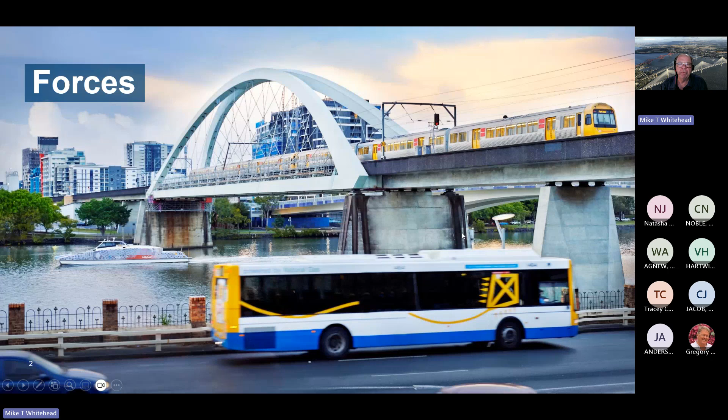So looking at forces first up: when you consider a bridge, we need to understand the forces involved and be able to handle them. Forces can be static, which are stationary forces that don't move, or dynamic forces, which are the moving ones. For this project, luckily we only look at the static ones. We don't have live loads or anything like that running across the bridge, or dealing with water, wind, or anything like that. So the bridge itself supports itself.

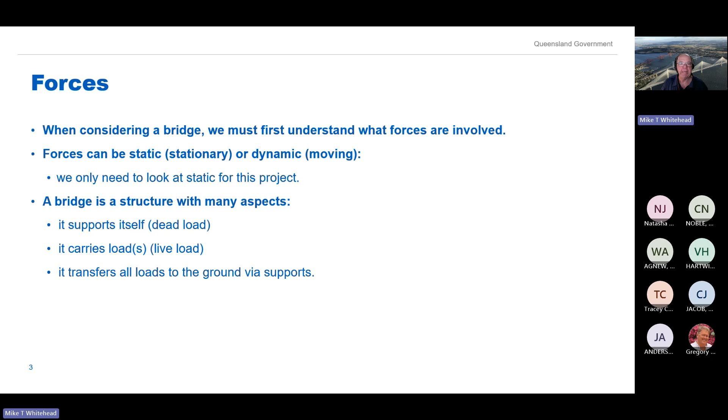It's a dead load, so it needs to be able to cater for that, and that's why we have weight restrictions on these structures. It carries a load, which is generally what we call a live load. In this case, the load will just be a single point load pulled down, so yes it is live as it's increasing, but it's not moving or dynamic across the structure itself. Then it's got to transfer all of those loads to the ground, because it's the ground that actually holds the structure up in the air. In this case, it'll be the test rig's supports on either side.

So when we look at the forces that we're talking about, there are 5 main ones, key ones, that basically all structures have to deal with.

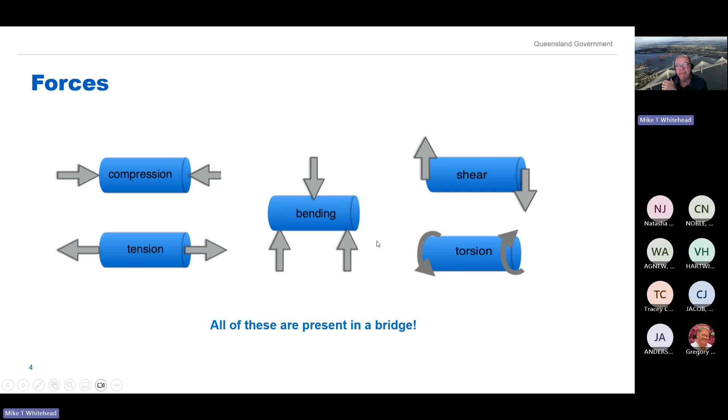When we're looking at compression forces, they're the forces that will squeeze or push the members together, and essentially the member will try to react and buckle, bend away. So the way we can best resist compressive forces is to increase the thickness.

Now what we can do with the spaghetti is, obviously the spaghetti itself is restricted to the size it's manufactured at, but if we put a number of them together, that increases the thickness.

Under tension, that's where they're being stretched, being pulled apart. Ultimately, it snaps. Not much we can do about that, but that's the way that one handles. Again, a couple of strings of spaghetti glued together will increase the capacity to resist the tension.

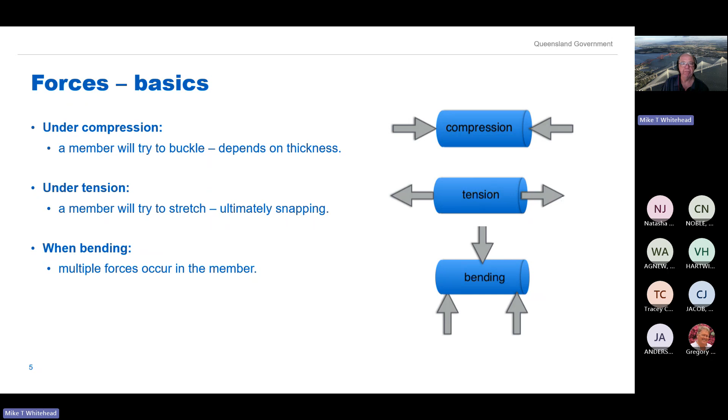And then you've got bending. Bending is where multiple forces occur. So to help explain that, let's look at a simple beam. The force P is pushing down right in the middle. For the spaghetti bridge, it'll actually be underneath pulling down, but it's the same result. And then you have the two supports, RA and RB, on either side holding the structure up. So when bending occurs, you can see the beam is actually bending down, and that's what's going to happen in a simple spaghetti bridge.

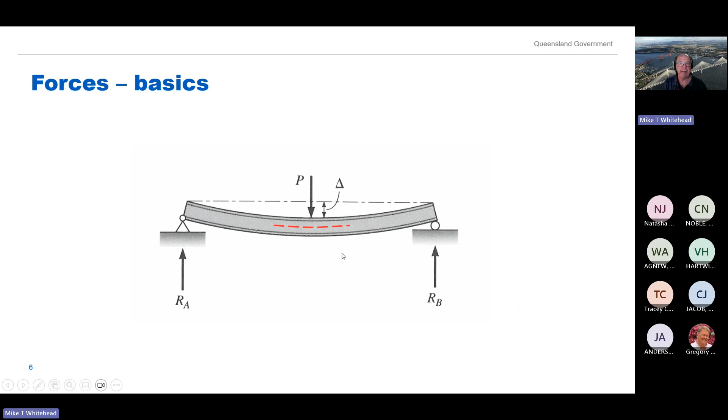Now, part of that beam—if you imagine a halfway line, those red dashed lines—the top part of that beam is actually in compression. The members along the very top are being squeezed together. You can tell because the shape of the bending is shortening it, squeezing it together. Whereas the ones on the bottom are in tension, being stretched. So a beam that's in bending is actually under compression and tension at the same time, and we can use that knowledge to our advantage—I'll show you that soon.

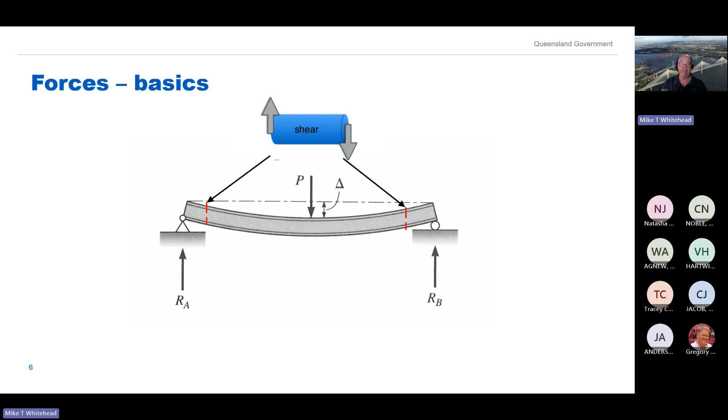There's also shear going on. So when you've got a force pushing down one direction and the support pushing up from the other direction, there will be a plane somewhere, usually out towards where the supports are for a beam, where it's just going to snap—that's where the shear forces are. So in a spaghetti bridge, that's the sort of area where you might need to thicken up some of the structures to handle that.

And the last one is torsion. Torsion is twisting. A beam will try to twist when it's under extreme load, and it depends on the shape of the beam and where the loads are placed—whether they're symmetrical or slightly off to one side. That'll determine which way the beam twists and fails.

So again, what we try to do is get a couple of beams or shapes side by side, and then brace them together so they stop that torsion.

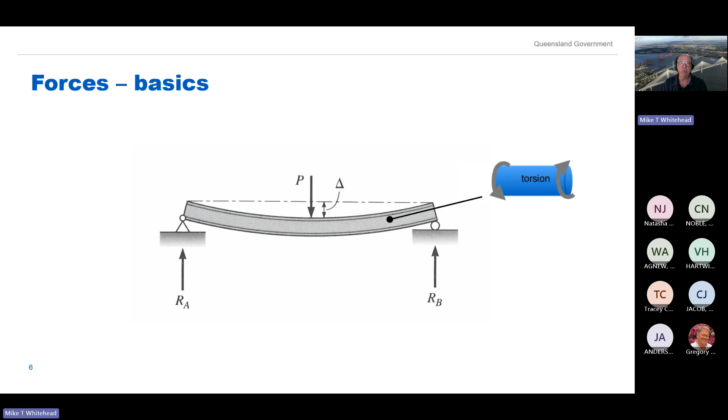So again, the main approach for this project is that the load is applied underneath whatever structure is on top, and the supports will hold that up. Hopefully, if the load is applied in the middle and the structure is positioned well enough on the test rig, the loads will roughly split in half—half going one way, half the other. So the structure should be designed and made symmetrical, a mirror image on either side, so it's handling the loads in the same way.

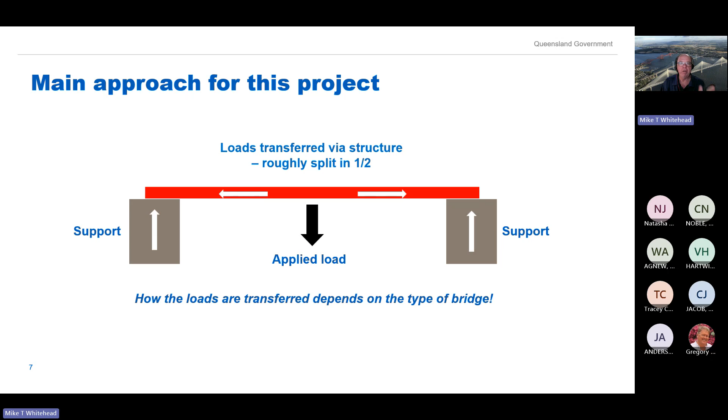We have seen some structures in the past where they do something a bit different on one side compared to the other, and so the loads then split and transfer differently, and the structure can behave in different ways.

Now that we've looked at the basics of the forces involved in the structures, let's look at some of the different types of bridges that we can use. These are the main types you will see: beam bridges, truss bridges, cantilever bridges, arch bridges, suspension bridges, and cable-stayed bridges. You can see examples of all of those in the southeast corner everywhere in Brisbane, and some up in North Queensland.

The beam bridge is obviously the simplest of all bridges. The truss has its benefits, but it's a lot more complicated.

Something a lot of people don't realise is the Story Bridge in Brisbane is actually classified as a cantilever bridge. So what we mean is if we could get a saw and cut the bridge perfectly in half, it would stay up, it won't fall down. Each support on each side of the river is holding the structure up.

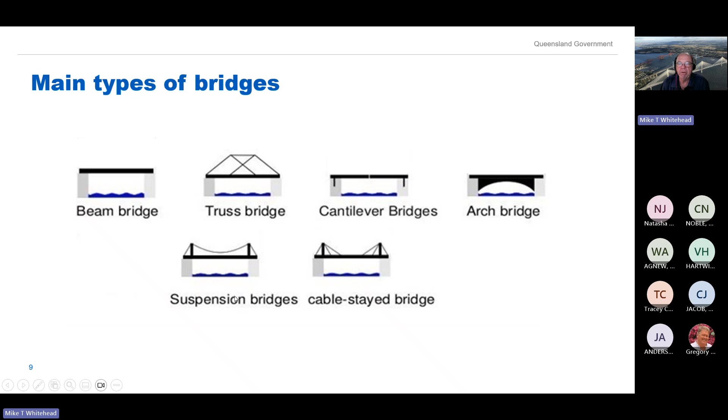We then have our arch bridge, which is one of the oldest forms of bridges around, and then suspension bridges and cable-stayed bridges are more recent versions, but they've also been around a lot more often.

For the spaghetti bridge, the types of bridges we're looking at mainly are the beam bridge, the truss bridge, and the arch bridge. Unfortunately, that arch won't work as shown, so one of the rules is we can't use the sides of the test rig for side support—it's got to sit perfectly on top. So we just switch the arch to the top.

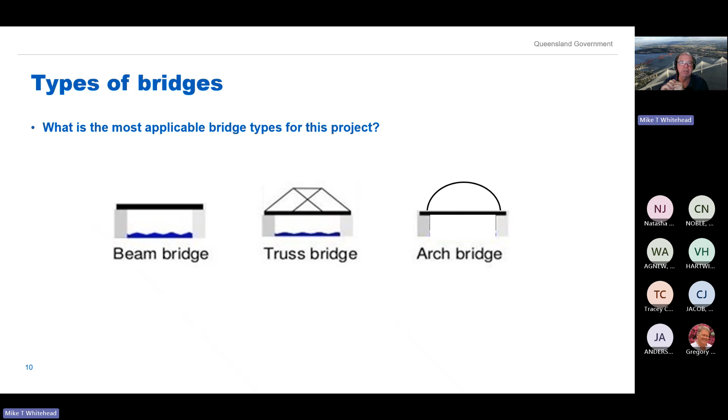Now let's look at some practical applications. The materials you're using are commercially available spaghetti—you just go to the shop and buy it, nothing too flash. You can use glue, which is white glue or PVA glue, hot glue, or super glue. We're not using resins or anything like that, just simple glues.

Dimensionally, the structure must include a loading hook at the midpoint of the bridge—Greg will talk more about that later. It must have a deck, and the deck must be wide enough for a matchbox car to pretend to drive over it, so we're looking at a minimum width of around 3 centimetres for the deck.

It's not a solid deck, so you don't need a whole lot of spaghetti lined up on it. You can have gaps between it, so it's a lightweight deck because we're not actually physically driving a car across it, but it must look like it's a deck for a bridge.

The bridge must span at least 37 centimetres with a clear span of 35 centimetres—that's the width between the test rig supports. If you only make it 37 centimetres, only a centimetre on each side is actually transferring the loads down, so some students make it a little bigger to get it adjusted and transfer that weight.

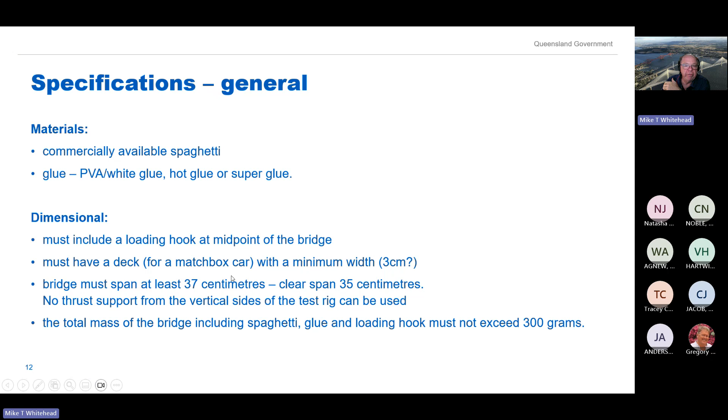No thrust support from the vertical sides of the test rig can be used—that's why, with that diagram of the arch, it was pushing against the sides, which we can't allow, so you have to move the arch to the top. The total mass of the bridge, including spaghetti, glue, and loading hook, must not exceed 300 grams.

So what do we need to consider? Key factors to understand are how the spaghetti performs, and it's a good idea for students to have a bit of a play and try it so they can see what's going on, doing some experiments.

What does it do under compression? If you get a piece of spaghetti and put your fingers on either end and push them together, you'll see it bow very quickly. But if you glue 5 or 6 pieces together and try again, it won't bow as easily—so it's handling those compressive forces much better.

Under tension, you can hold a piece of spaghetti and load it from the other side, seeing how much weight it can carry before it snaps. So that's it under tension.

Obviously try it when it's actually glued—you could try a piece of spaghetti dry, then glue it, let it dry, and see if that changes it. We've heard of instances where people used a lot of PVA glue, and it can weaken the spaghetti, relying more on the glue itself. So, can you bend it? Can you not bend it?

Test it when it's being glued and when it's wetted. You'll see some of the shapes that come up, particularly with the arches, where students in the past have made little rigs for themselves. They've wet the spaghetti to bend it into the arch shape, but then it's got to dry. Does that change the properties of the spaghetti?

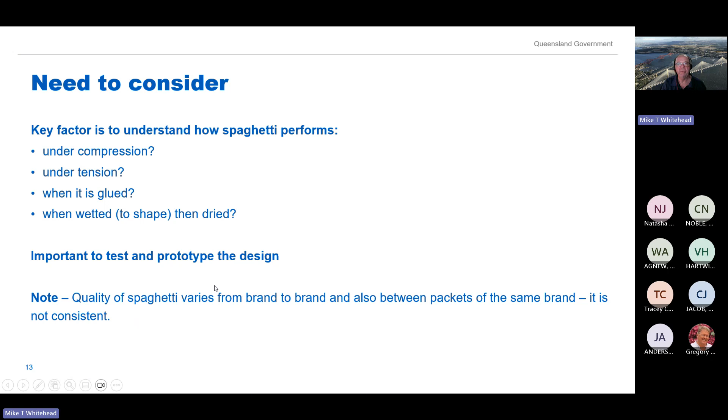How the metal hook is supported is critical. Apart from the hook where we connect the test rig, it's got a little plate, and that plate is what holds the hook to the spaghetti bridge. Students have to think about how they're going to support that and give it as much strength, because that plate is going to want to pull through the spaghetti and fall out of the bottom.

So to transfer the loads to the sides, it needs to be put into the structure quite well. Try and utilize the whole plate area to transfer the load, not just the edges, or it'll pull through quite easily if we do that.

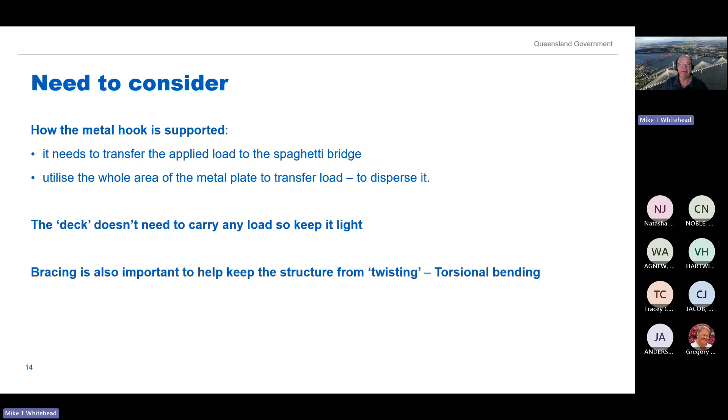As I said, the deck doesn't need to carry any load, to keep it lightweight. Bracing is also important to help keep the structure from twisting. So instead of just looking at a simple beam and making it as big as possible to carry the weight, simple beams will try to twist. What we suggest is to get a couple of them together and brace them up so that they stop the twisting.

Now, if you go down the path of looking at a truss bridge, there are several trusses around. Google them and you'll see all sorts of different ones pop up. The typical ones are what we call the Pratt truss and the Warren truss, and it's just the way they perform and the way their members are put together.

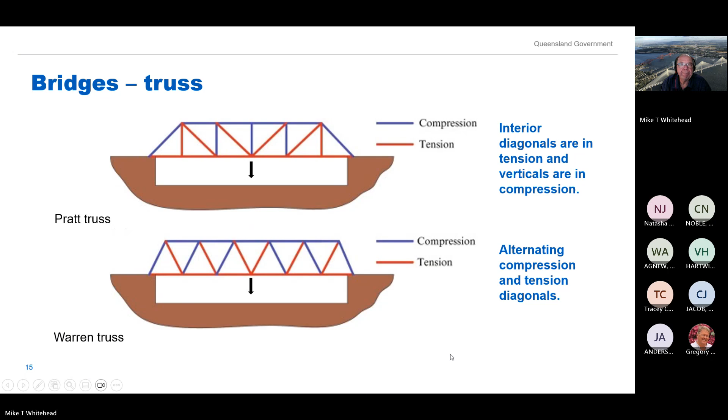Here's another diagram of a truss bridge. This one just shows you the detail. You wouldn't need to go into that for a spaghetti bridge, but it does give you an idea of all the bracing that goes on.

Apart from the deck, which carries a lot of the load, that deck loading goes up into the truss, and the truss then transfers it to either side of the structure. You can see the different members that are available, and you'll also see the cross bracing going on, again to help with the twisting issues.

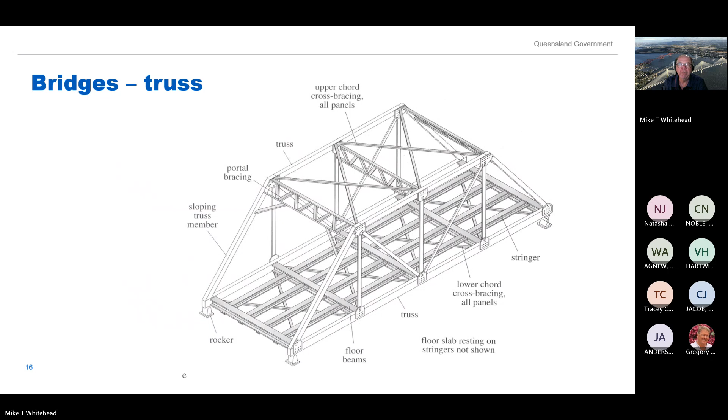A great example of a truss bridge for those up in North Queensland is the Burdekin Bridge. It's one great big long truss, but each component is very similar to the next from one pier to the next.

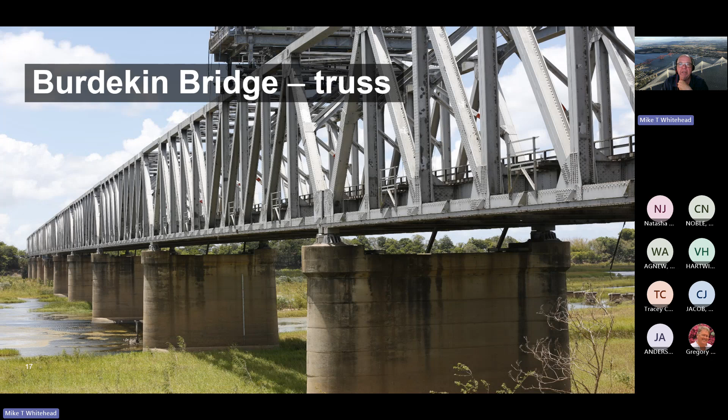Then we move on to arches. So arches are a little bit different. The normal arch, pictured in this diagram, has your stiffening girder or deck where the loads are applied. Then we use vertical hangers to take the loads up into the arch, and the arch transfers them under compression to the supports on either side. So that's a normal arch.

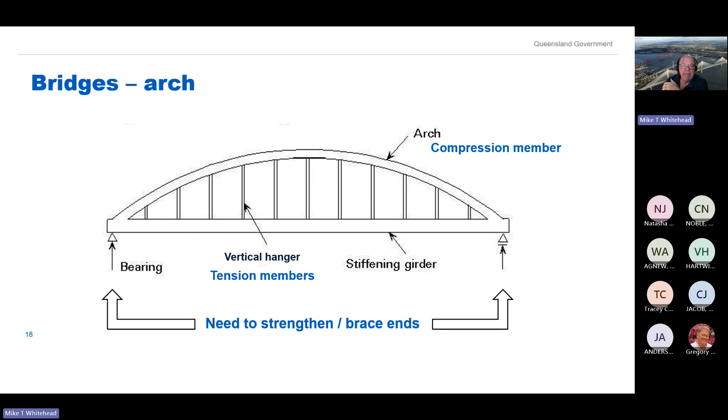With spaghetti bridges, and there's a picture of one in the top right corner, you'll see them if you do some Google searches. Because the load is being applied in the center, the vertical hangers are no longer vertical - they actually radiate out from that. The idea is so that the load is taken straight into the arch by virtually all of the hangers being used. So that's one way of doing it.

But again, the trick here is to get the arch as circular as possible. Obviously, the spaghetti has to be wet or dampened slightly to be able to bend like this - it doesn't have to be much. Some brands are a little better at bending than others, but most will snap pretty quickly, so they do have to be dampened to bend around. This usually requires the team to build a rig so they can bend it around and hold it in place while it's drying, particularly once it's glued.

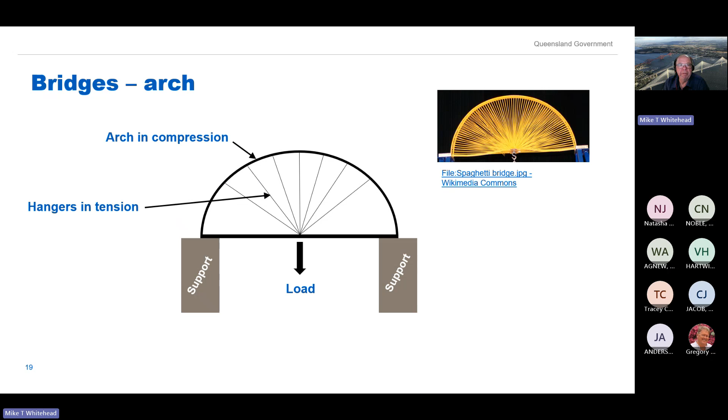There's a picture of an arch bridge in Brisbane. The hangers are a little bit different than straight vertical, but they're certainly not radial out from the center point.

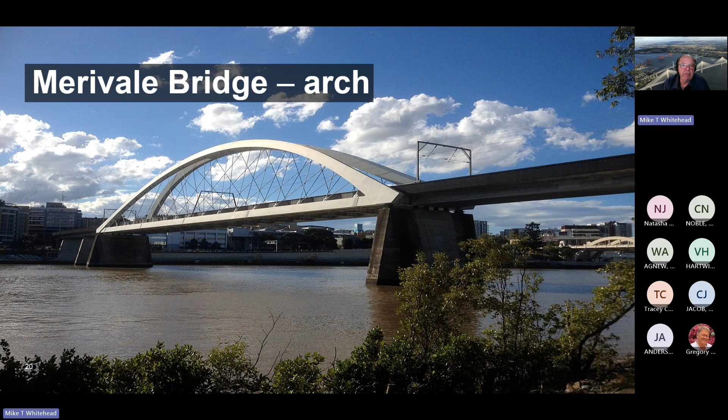So beam bridges are simple structures. Beams or girders need to be thick or deep enough to resist the bending forces. A good example is if you've got a normal 30 centimeter ruler, put a couple of pencils on the table and lay the ruler across those. If you put your finger in the middle, it'll bend very easily and you can touch the top of the desk without much effort at all.

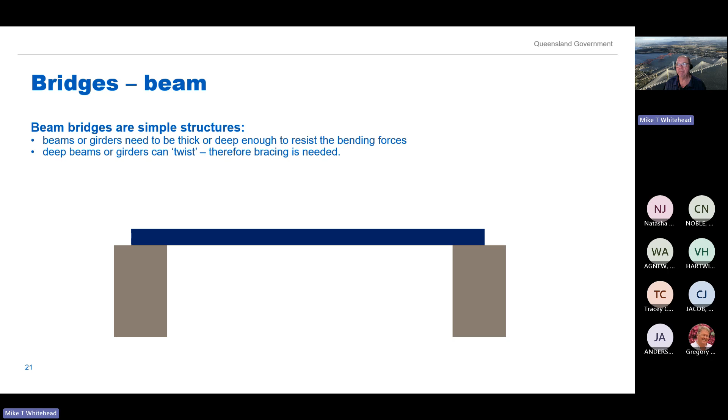But if you stand the ruler up on its edge and try to push it down, you'll find it won't go. So the thickness in the direction the force is applied is where it gets its strength from. But because it's very thin, the ruler will twist quite quickly, so sometimes you need a bit of thickness in width to resist that.

In beams, what we do for beam bridges, for example, we'll have a number of beams depending on the width, but then we'll have cross bracing between the beams to minimize that torsional twisting that could go on. For a spaghetti bridge, you could use two beams, one either side. The deck will go across, and some cross bracing underneath to help with the twisting could be sufficient. Now, there are many different types of beams available.

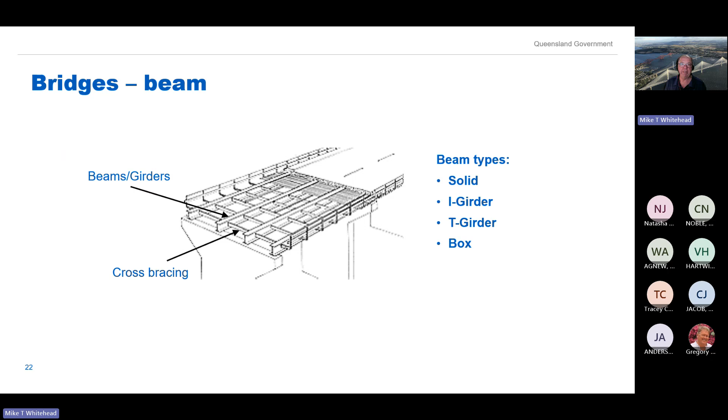So we have solid beams. You can have I girders, T girders, and box girders - we'll talk a little bit about those. In a solid beam, the dots represent a cross section through the beam, where each dot represents a piece of spaghetti. We could give it some width, give it some height, glue them all together, let the glue set, and that gives you what's called a solid beam.

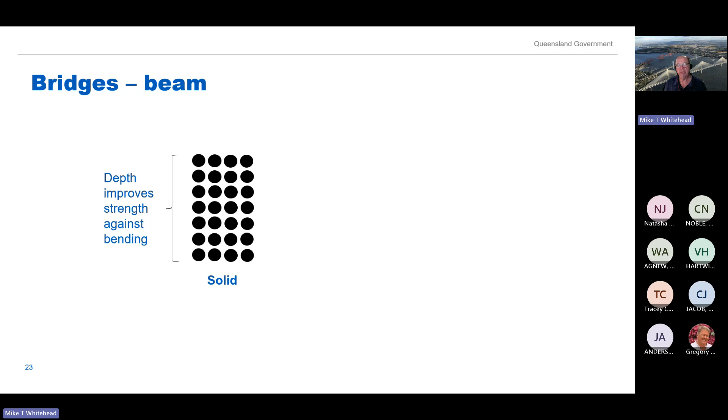So again, the depth improves the strength against bending, so you could do some testing to work out what will actually hold a fair bit. And the width can resist the twisting. Now, if you put two beams side by side with some cross bracing, the width doesn't have to be all in one beam - it can be shared across it. Now, we have two common variations that we can use.

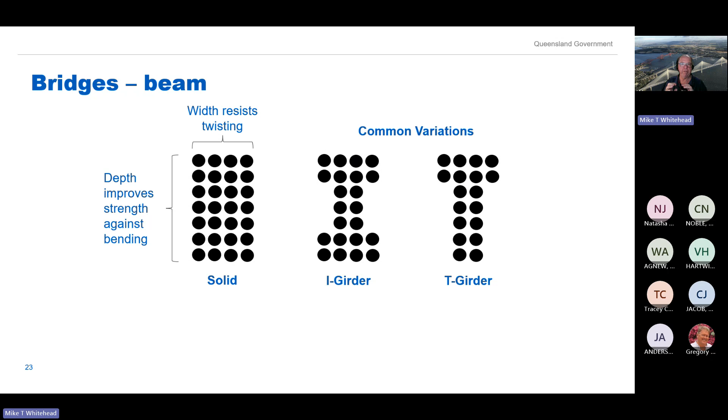The I girder and the T girder. So what are the benefits of these - if you look at the I girder, it's quite thick at the top, also quite thick at the bottom, and thin in the middle. If you go back to that earlier diagram of a beam in bending, the top part would be under a lot of compression, and we know to resist compression you need to thicken it up, so that's where that top flange benefits. The bottom flange for an I girder can also help if the beam is being bent in different directions.

So in the spaghetti bridge, because it's only being bent in one direction, a T girder is probably beneficial. The top of the T gives you better strength on the compression side of things, whereas the bottom is in tension, so you don't need quite as much thickness.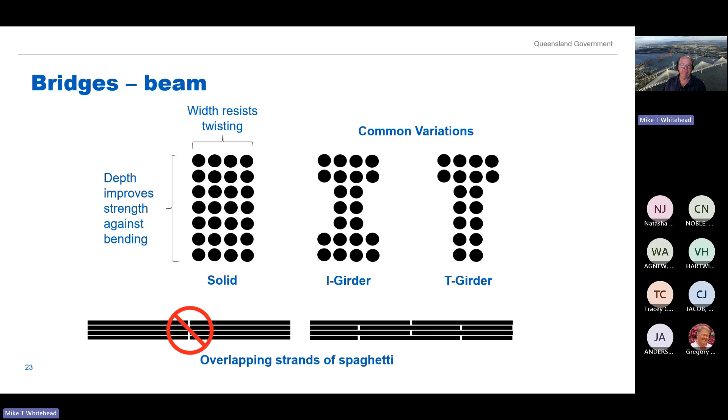The other thing to be aware of is overlapping the strands of spaghetti. When you do a join, don't do it down the middle like demonstrated, because that's relying purely on the glue. It might be arguable the glue is stronger than the spaghetti, but you'd be placing shear planes where the spaghetti is all lined up together. The best thing is to overlap as best you can, so no single join lines up with another. That spreads the shear planes out and gives you a more potentially homogeneous girder or beam.

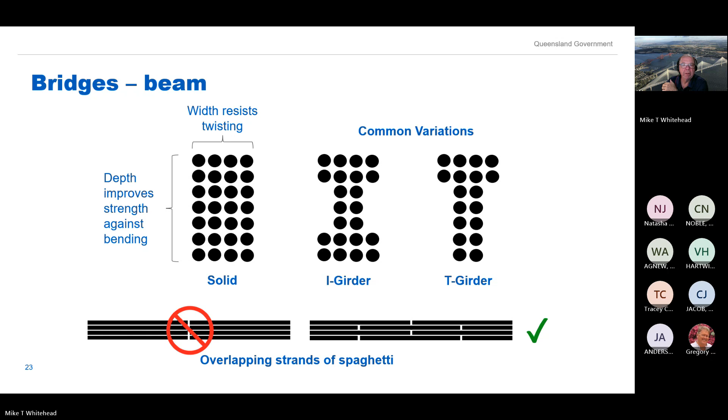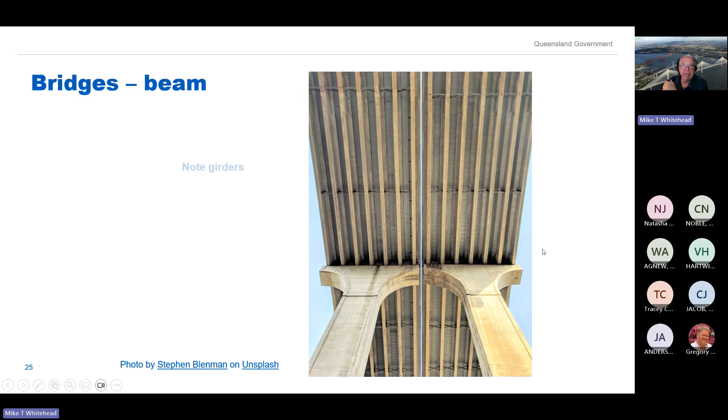This is a picture of a typical beam bridge we build quite a lot of in Queensland. They're simple, cost effective, and do a very good job. Here's the underside of a bridge—not many people get underneath and look up, but you can see a whole series of girders, seven of them, with cross bracing spaced out between them that helps with the torsional twisting.

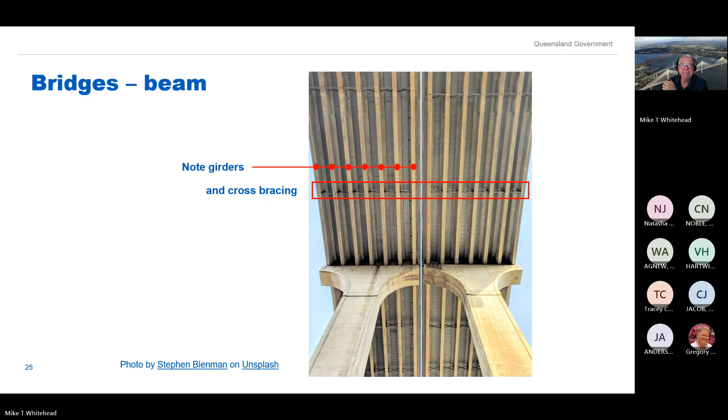The last one I'll talk about is what we call a box beam. Essentially they're a big box, and the Gateway, which the picture is from, is exactly that—hollow inside. The benefit is instead of making a solid beam, they get the strength for bending from the depth, with high walls on the sides and cross bracing across the top and bottom. So it's hollow, and we've got people who can walk inside to do inspections, in the Gateway and the Riverside Expressway too, which also has hollow beams people can walk inside for inspections.

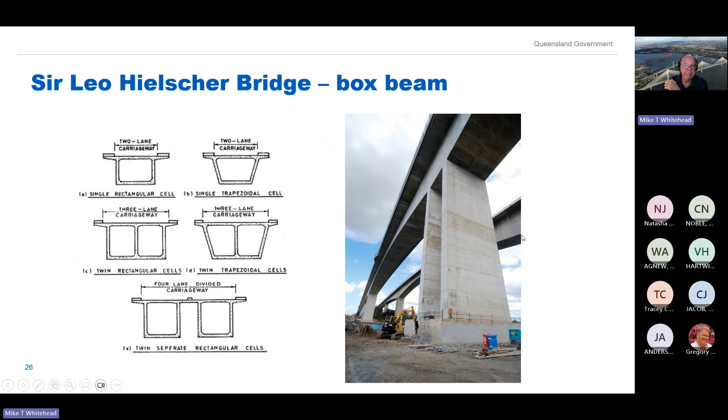The pictures on the left show a number of shapes. But the students, I think, could easily build a simple box beam. The top would be your deck, the bottom would be part of your bracing and probably strong enough, particularly if you strengthen it around where the hook is, and the sides could be quite deep while giving you some strength. I'd like to see a box beam—I don't think I've seen one built in my time with this project, but that's one that would work.

So with the spaghetti bridges, again, I recommend the students, the teams, have a look on Google at different types of bridges, have a look at ones which are stronger. There's plenty of examples of past competitions from various countries. The arches do seem to win out quite a lot, but they're also quite difficult to build—it can present a challenge.

As I said, I think a box beam would be another successful design. We've got a lot of big bridges around the world made of box beams, and they are very capable structures. Try not to get your students to build very thin bridges that are very wide—they will collapse very, very quickly. They need some thickness in the vertical plane so they've got some chance of holding up the weight applied, giving them a chance to have a bit of a win, or at least do well in the competition.

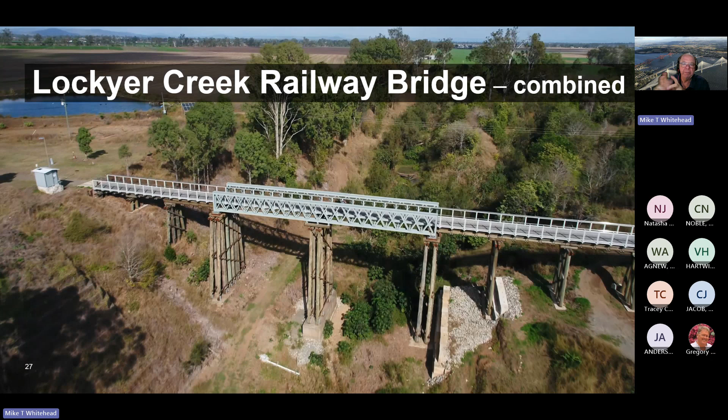But that essentially is it from me. Back over to you, Greg.

Thanks, Mike. Turn on the right thing.

Mike's covered a lot of the information specifically regarding the competition and the specification, so I'll probably cover some of those again, but I think it's important. So welcome to those of you who have never participated in the competition before, but I know there are some of you in the webinar that have done it before and are here for some tips and advice, which is obviously welcome.

If you are new to the competition, it's actually open to all grades from 5 up to 12. So if you're a P to 12 school or a 5 to 12 school, or have really good connections with your feeder schools, if you are a secondary, your primary feeders, then by all means, feel free to invite them to the competition. They are most welcome. We've had the youngest place getters we've ever had were grade 6s from a few years ago, which was pretty cool. They came third, which is very exciting. So it doesn't matter how old, kids are still more than capable.

You can have teams of up to 4. Individual students are most welcome just to design and build a bridge. Teams can nominate more than one bridge. They just have to give their bridge a different name so I can keep track of which bridge is which. But if they want to enter more than one bridge, they're most welcome to do so. Mike's talked about the bridge, the spaghetti and the glue, and I'll go into that in some detail in a moment.

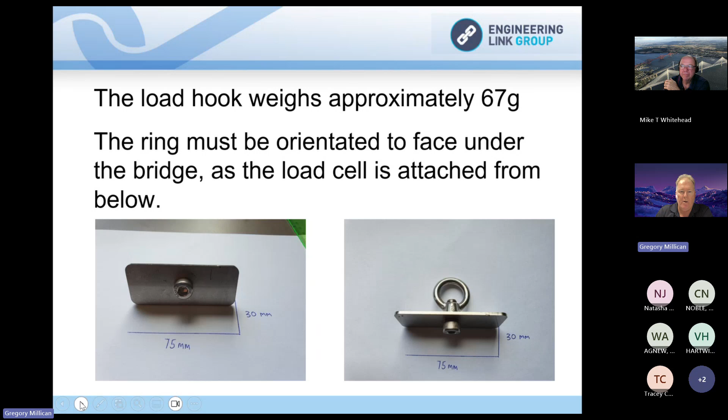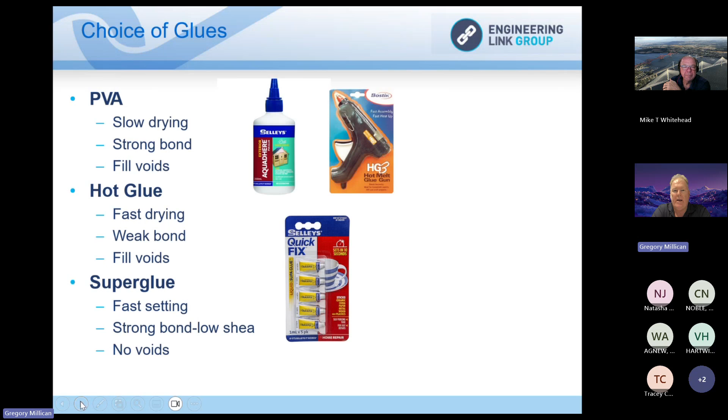What you're not allowed to use is liquid nails in any form, whether that be a caulking gun or in a tube like that, or Gorilla Glue or epoxy glue or anything of that nature.

It's very, very difficult for us sometimes to know what kind of glue has been used. It's pretty obvious when it's Aquadhere and hot glue, but sometimes the super glue and the epoxies can look a bit the same. There's no real way for me to test that, so it's more on a trust thing, to be honest with you. I really have to just trust that schools are doing the right thing. There have been occasions in the past where schools, it's been obvious that they've used the wrong glue, and I've had to disqualify them, unfortunately. It's a very unpleasant conversation to have, I can tell you.

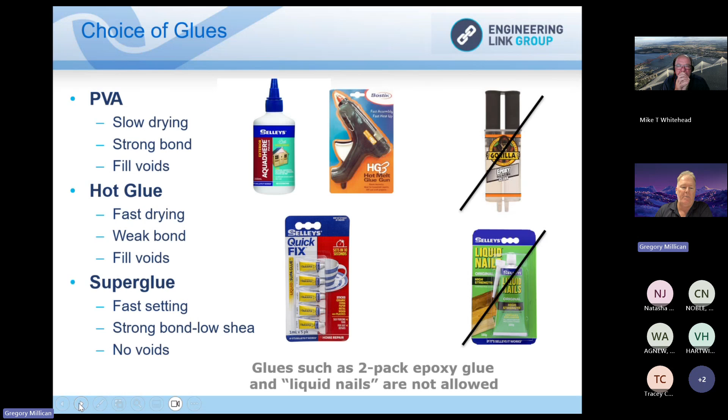So please encourage them to use only the glues that are allowed. If you're at all unsure and you want to check, please don't hesitate to send me an email and ask, or you can ask at the end of the session. Mike went through this really well, so I'm not going to spend a huge amount of time on this. There are a heap of designs up on our YouTube page, including some videos and stuff you can have a look at.

Try different glues, see what works and what doesn't. It depends on your circumstances and how much time you've got.

Think about it - like every good activity, all students want to do is just grab the spaghetti and the glue and start building. But try to encourage them where you can to actually do some design first, and have a think about what it might look like.

Allow them to look at this. The recording of this video will be up on YouTube and on our website. Students are encouraged to have a look at it, particularly the first part, to get those ideas and make their bridges as best they can.

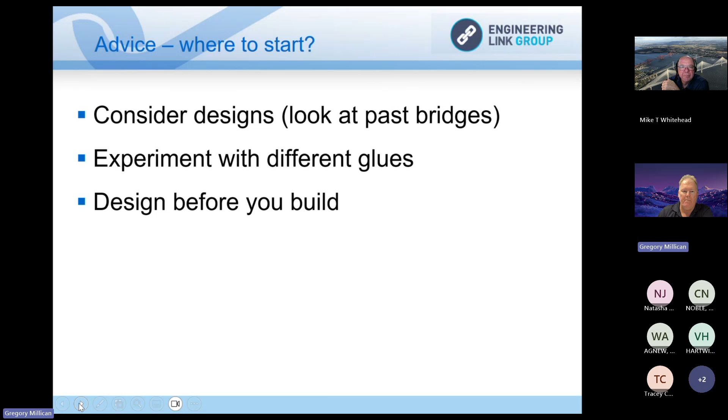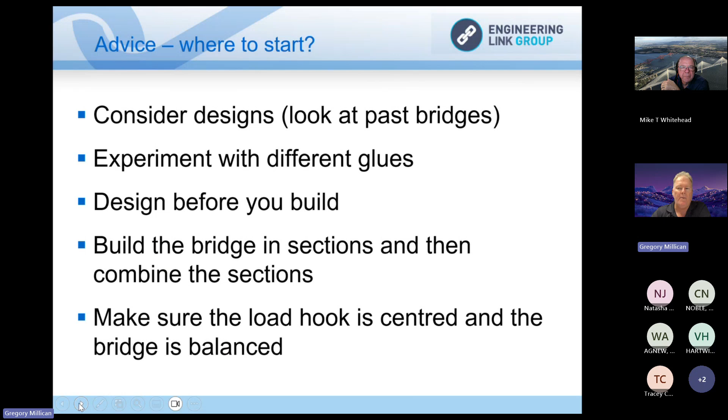I think it's really important that the load hook is centered as much as possible. If you're sharing your load hook between different teams, just make sure the hole is available so they can transfer the hook from one person to the next. But if you did want more than one hook, just get in touch.

Someone sent me an email the other day asking if I knew of any designer websites they could recommend to their students. These are the two that people have used in the past, so I thought I'd put them in this slide: Truzme and bridgedesigner.org. If you have the capacity or time to run through these with your students, or at least let them have a play with it, they are two that students and teams have used in the past.

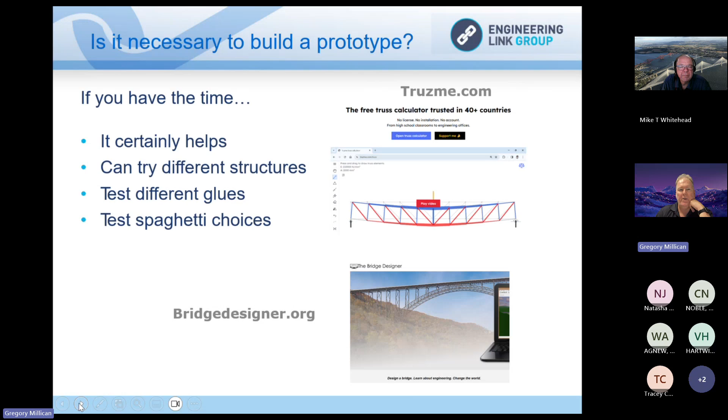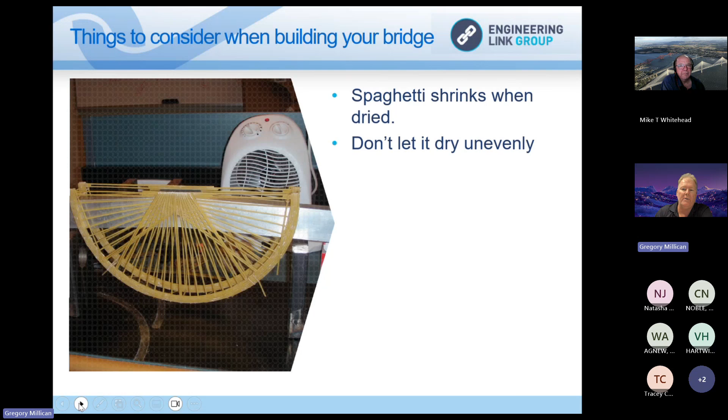He discovered that if spaghetti is wet and then let dry, it shrinks, which can distort it if it's already in position, or throw your bridge design off a little bit. It needs to dry evenly for fairly obvious reasons.

He discovered that you should try to use spaghetti from the same packet. Typical spaghetti packets are 500 grams, and since you only need about 230 to 250 grams for your bridge, you should be able to get it all from the same packet. Then you can hope it's all from the same batch, which means it should be as even as possible.

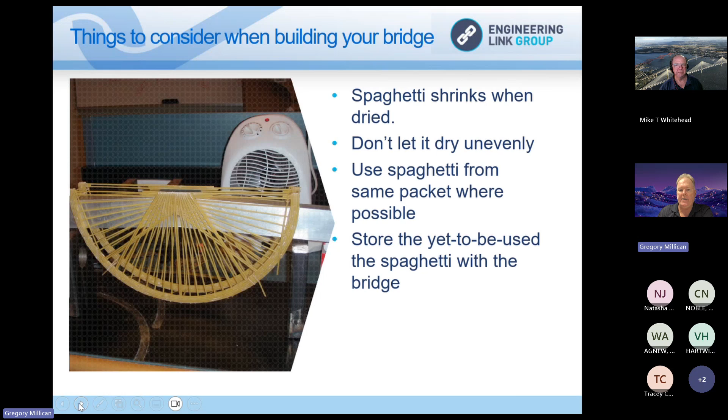When you're storing it, keep the spaghetti with the bridge. It's in the same conditions then - same atmospheric conditions - so it'll deteriorate, or not, at the same rate.

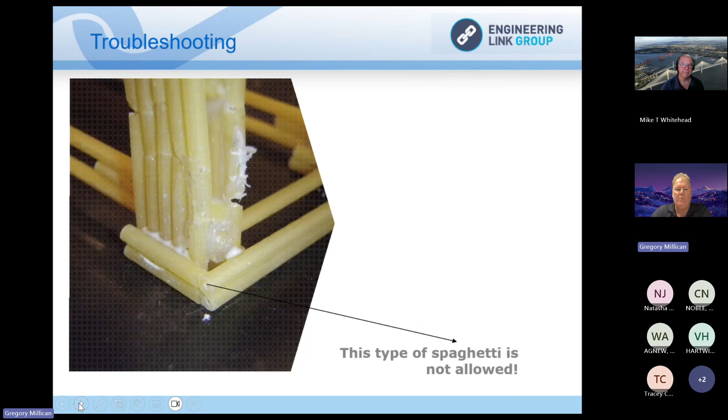This is a bridge that was made a few years ago. It unfortunately had to be disqualified. As you can see, there are holes in it which can then be filled with glue, so you can't use that type of spaghetti.

Mike's already mentioned this, and I'll go through it in more detail in a minute, but just make sure the feet are longer than 35 centimeters and that they're level. The more level they are, the better it's going to sit on the rig, and the more evenly the forces are going to be distributed.

Already talked about this, but don't use too much glue. I don't know if you can see my mouse, but this amount of glue here is fine. It's very difficult to minimize it, and we have had bridges in the past where it looks like they've just spray painted their whole bridge with glue, which sort of defeats the purpose. Of course you're going to have some excess glue - there's nothing you can do about that. But as long as it's not obvious that all they've done is hot dip their spaghetti bridge in a glue vat, that's going to be fine.

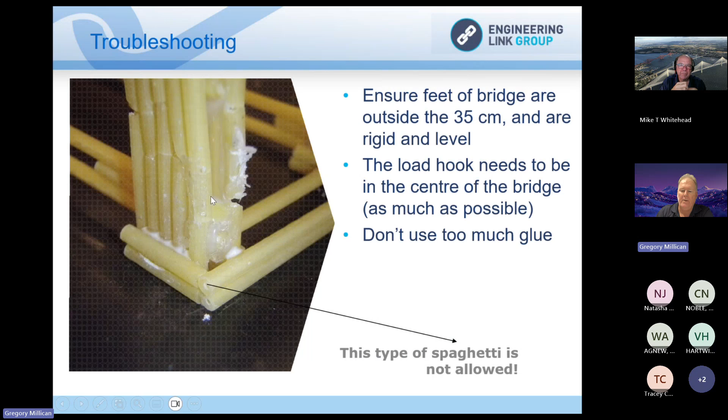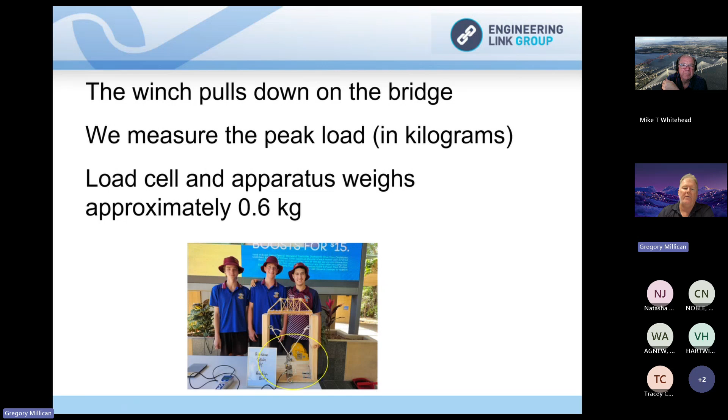In the past, we've given them 1 kilo, but that was being a bit generous, because sometimes you can load it up and it breaks at 0.8 and it's not really fair because at least they've had a load on it. So we leave that — we're going to make that 0.5 this year.

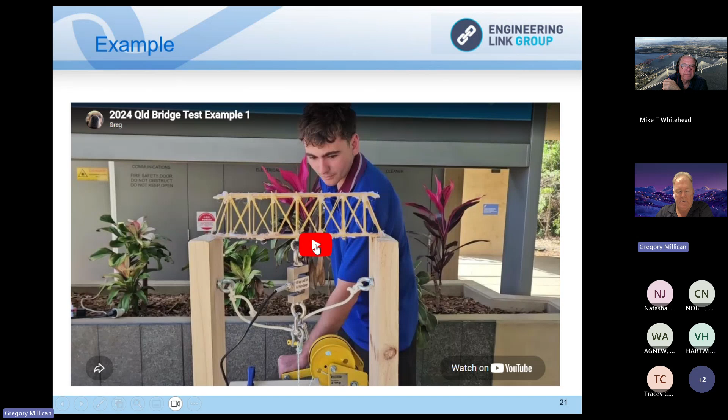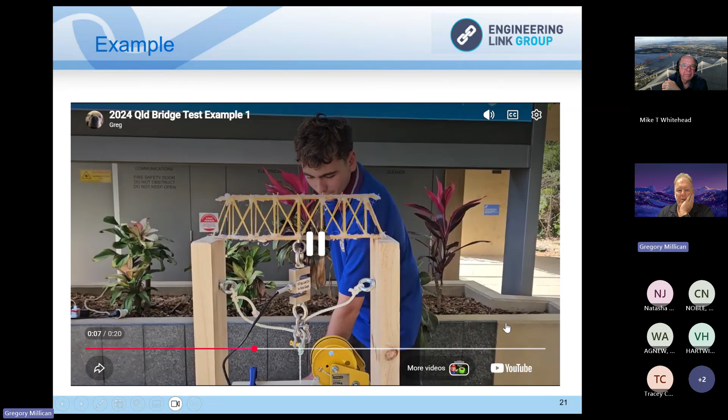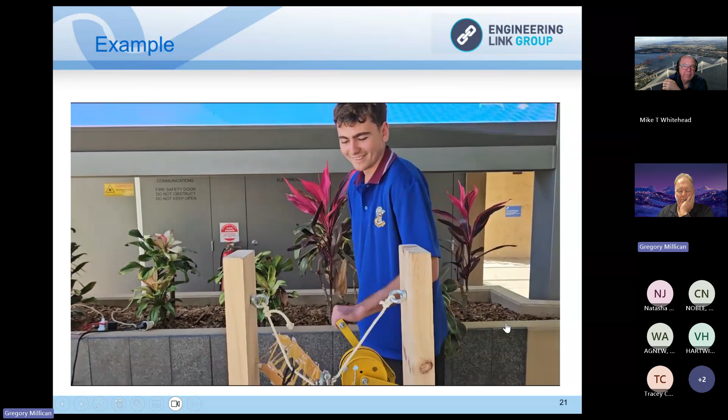Here's an example of a test, just so you can see it. I'll run it through. Apologies if it's too loud, I can't do much about the volume, but let's see how it goes. So we wind it up. The students do their own testing. Keep going, keep going, keep going. Still taking strain, still taking strain.

Here's another test from a couple of years ago. This one, from memory, was actually overweight — higher than 300 grams — but irrespective of whether it's overweight, I will test it. It just won't be eligible for any prizes. So if a student builds a bridge and rocks up and it's too heavy, that's fine. They can't be part of the competition for the actual winning prize money, but I'll absolutely still test their bridge. They put the effort in, I'll still make an effort to test it for them.

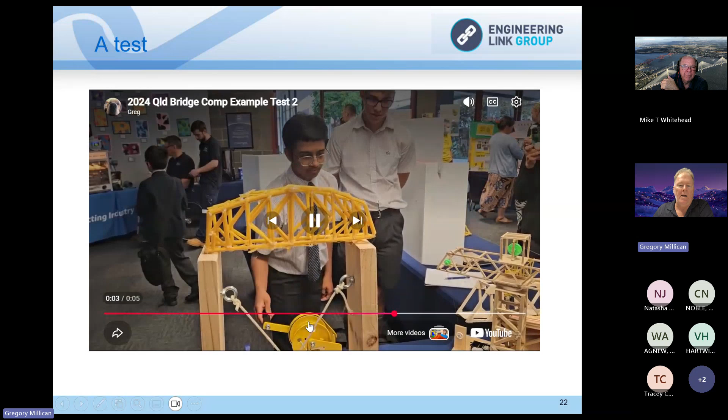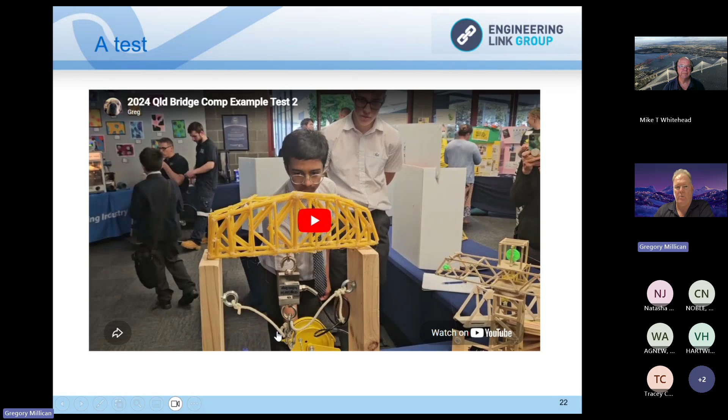Sorry again about the volume. Let this one go. Now that's a good example of what Mike was talking about there. Yeah, so that was a good example where, in this one here, the plate was not supported well enough, and so it just pulls straight through. There's literally nothing we can do about that. So when Mike was talking earlier about supporting that load plate, that was the consequence of what happens when you don't do that.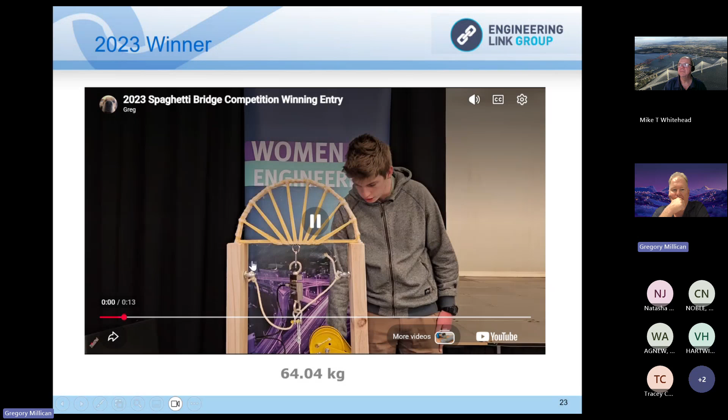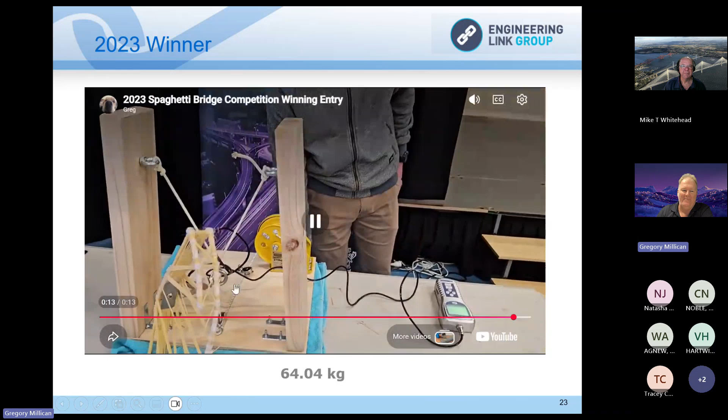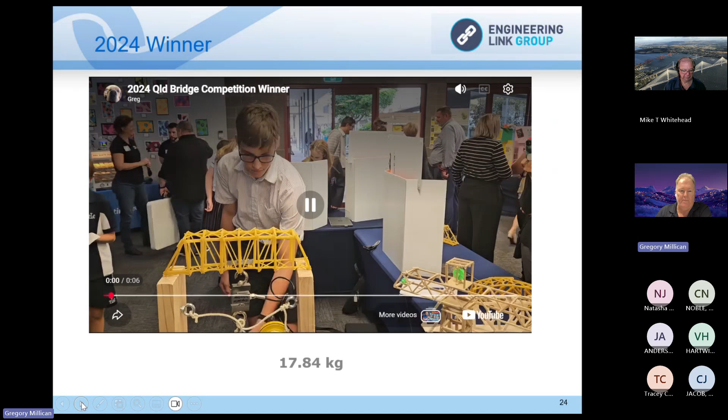This was the winner from a couple of years ago, and it's the highest that we've had in many, many years. So I thought I'd show you this one — note what happens to the rig. You're ready, mate, just keep an eye on that weight on the scale as well. Is it working? Yeah, cool. Yeah, so she goes quick when she goes. And as you can see from the bottom, that was 64 kilos of load with that bridge there. So that was an impressive piece of work. You're ready, mate. Ready? Yep, that's fine. So that's how it's tested.

As you can see, it's pretty straightforward. We encourage the students to get heavily involved in their own testing. It's their bridge, so they find that a lot of fun.

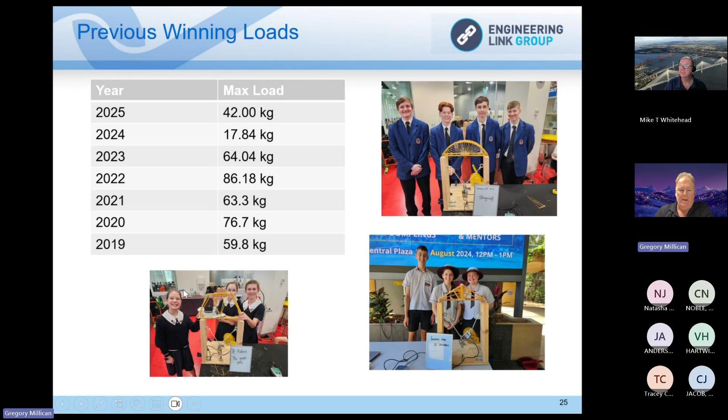As you can see, maximum loads have changed over the years. For some reason in 2024 they weren't very high, which is perfectly fine, but they've started to recover back into what is more likely — somewhere between 50 and 70 is where we've been most years. But last year we had 42, then I think 35, and most bridges are from 12 kilos and down. Those results are available if you're keen and interested to find out.

So at my school on August the 12th, and up in Townsville on August the 14th, that's a Friday. Then down to the Gold Coast, and then up to Marsden on the 19th, that's a Wednesday from memory. And then up to Rocky on the 26th, and then at the Sunny Coast on a Monday, the 31st.

So the idea is if you're at a location near any of those, you're most welcome to come to one of those. I'll provide specific details for each location as soon as they become available, and we'll update you as we go. The one on the Gold Coast is in the morning, and Marsden is in the afternoon. But other than that, those are our locations.